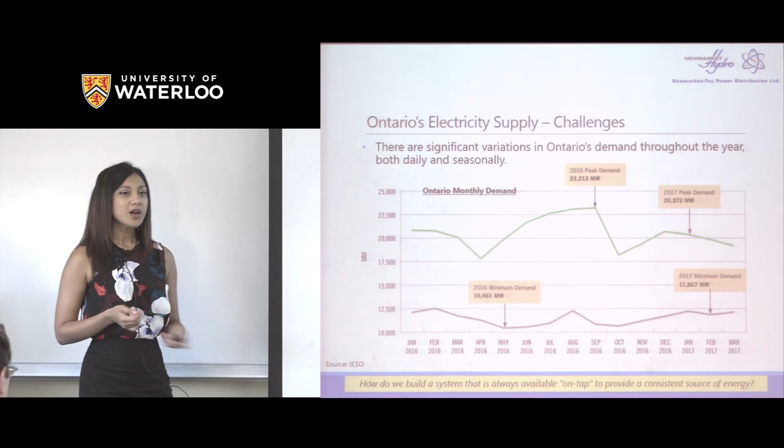So one of the challenges of Ontario is that we're unique in the sense that we have significant seasonal variations right down to a daily variation. This is just a snapshot I pulled off the IESO website. You'll see that we peak really high, but when we don't need energy or demand, we're quite low. So one of the challenges is how do you design an electricity system that's always there, where it can meet our peaks, but also you're not going to waste any extra energy you generate.

If we create a system that's always operating at this level, you're wasting a lot of that power that you're creating. Power is money to create that extra energy. Similarly, if we're always down here, your lights are going to go out as soon as we start peaking and getting extra demand. So one of the challenges the IESO has is how do we balance the different sources of energy to make sure electricity is always available? That's one of the things we have to consider when we're looking at the supply mix.

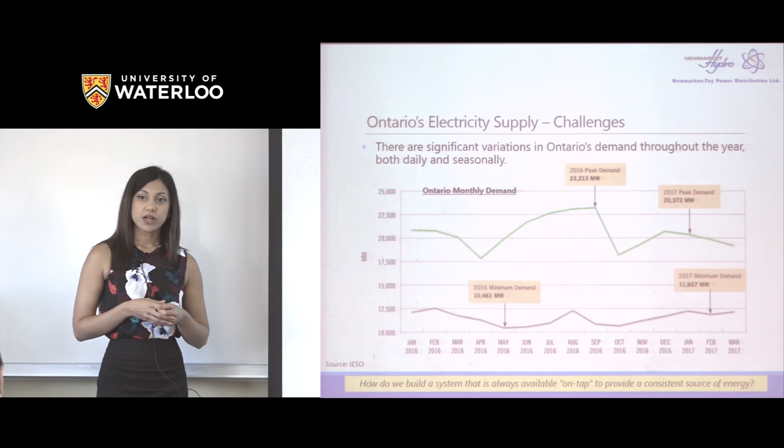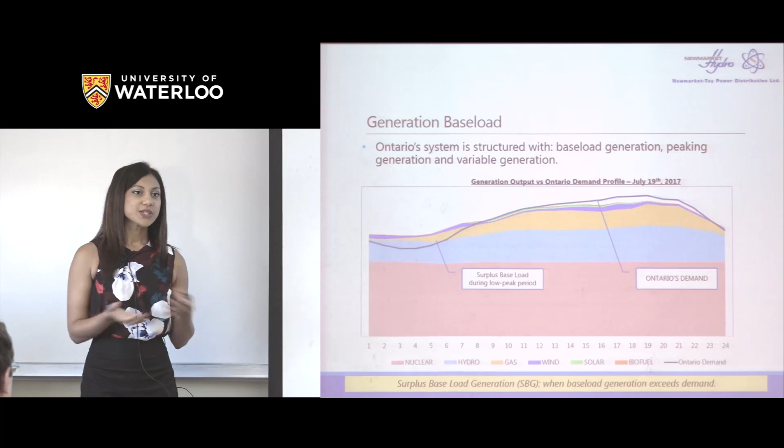So what is the IESO solution? What does Ontario do to take into account all these challenges that they see on a daily basis? This is actually one day. As I mentioned, in a day our demand fluctuates quite a bit. Here in the morning, everyone's asleep, so our demand's pretty low. During the daytime it starts peaking. But it's interesting that our peak is actually between 5 to 8 p.m. in the evening. Usually people go home from work, turn on their ovens, stoves, everything. All of a sudden, Ontario's peaking, right?

But the whole planning of Ontario's electricity system is such that we have what we call baseload generation. These are our nukes, our nuclear guys, as well as hydro. These are on 24/7, so your lights are always on. They're always providing energy to us regardless of what time of day it is. As you can see, they're fairly consistent throughout the day.

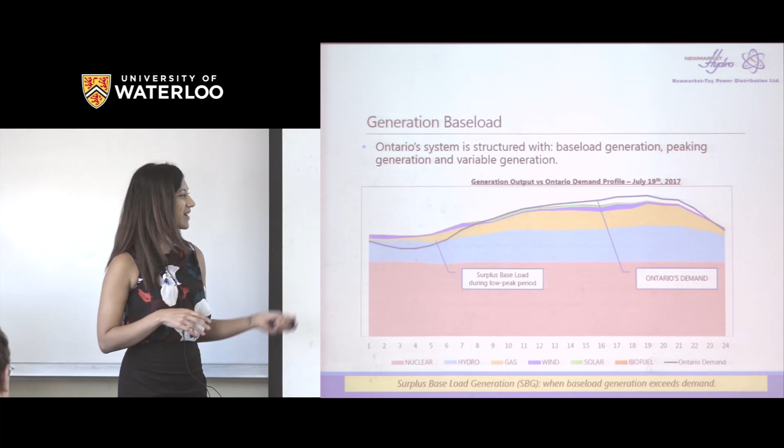And then as soon as we start peaking, we start tapping into natural gas, right? So natural gas is what we call peaker generation. So they're fairly good at ramping up and ramping down without any financial implications. A nuclear power plant, you shut it down, it's going to take a couple of days for it to ramp back up. So you might have some instances where you don't have any power. So we try to keep those guys on all the time, whereas our gas generators will kind of kick in.

And then solar and wind and the other renewables, they'll come in on their own, depending on when is the wind blowing, or when is the sun out. So that's what we call variable generation. So we can tap into them. If it's a sunny day, sure. If it's cloudy, solar is not going to do much for us, right? So it's really a game for the IESO. They're looking at their supply, they're looking at their demand, saying, what can I tap into today to make sure our lights stay on today, right?

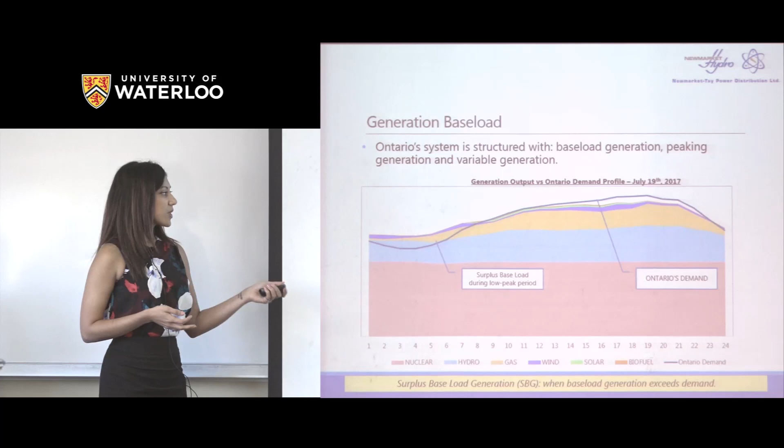So one of the things that I hope struck some of you when you're looking at this is if you have something that's on all the time, what if Ontario's demand is low, right? We don't need that extra energy. So if you look here, we generated all this stuff here, but we didn't need it, right? So that's money. It costs to generate energy. So what does Ontario do with that extra energy? Sometimes you have instances where we don't have enough energy. So where do you get that extra from, right? So this is what we call surplus baseload generation when this happens.

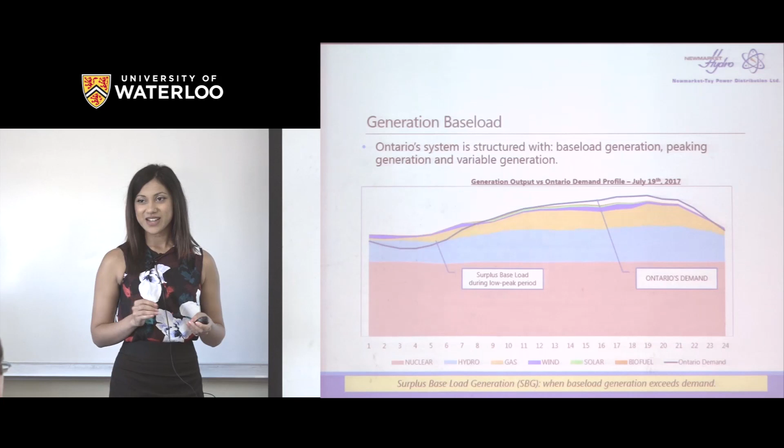As some of you may have heard, we have some contracts with our neighbors to sell them our energy. So when we have extra energy just kind of sitting there, we say, hey, Mr. Quebec or whatever, would you like to take some of our energy for this cost? The problem with that is it's really cheap, because if you're trying to get rid of something real bad, you're obviously going to put it at the lowest price possible. Sometimes these are at negative prices too. So that's one of the issues with surplus baseload generation, right? Because once electricity is generated, the instant it's generated, it disappears.

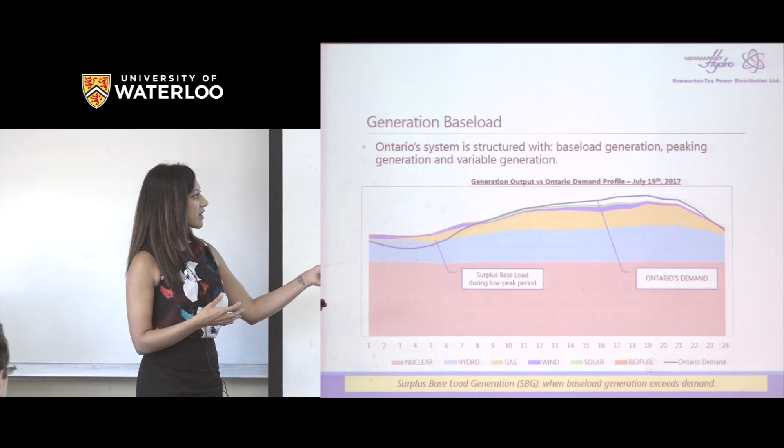This is kind of alluding to what I'm going to go into a little bit later, but can we find a way to keep that electricity here and maybe use it a little bit later, right? Because we're going to need it. This generation, if we kept it, we could have used it later in the day instead of selling it to somebody. Another challenge is with wind and solar. As I mentioned, wind and solar, they're on their own accord. I can't control when the wind is going to blow. I can't control when Mr. Sun is going to come out and generate energy.

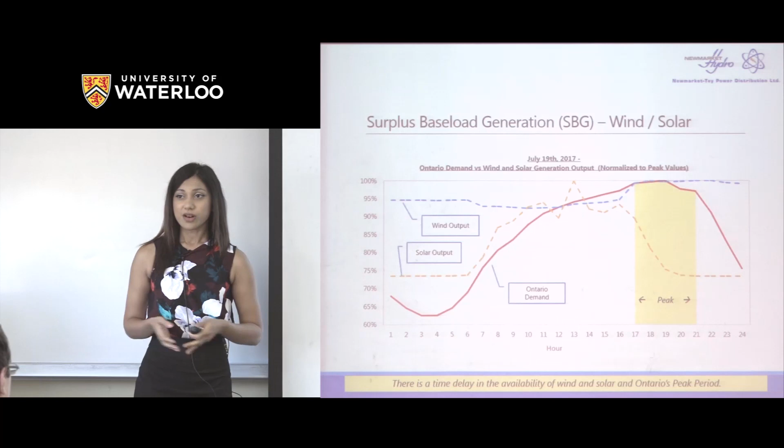So you'll see here the same day, we had our demand go like this, but wind was actually at 95%. It was generating all day long, but we didn't really need it. You see we were low demand here, but wind was pushing out a lot of energy. Same with solar. Solar is pretty useless during peak time here, but it was peaking in the middle of the day around noon, when we didn't really need it. So a lot of the time their capacity factor, meaning how much of their energy we're really using, is maybe like 30% or lower, because we're not using them to their full capacity.

So these are where our generators are. Again, I stole this from the IESO website. It's actually a dynamic website, so I do encourage you guys to go and have a look. You can click on these links and see, okay, what is this plant called? How much is the output? But you can see it's all across Ontario. Wind is kind of just congested over here, but hydro and everything is everywhere across Ontario.

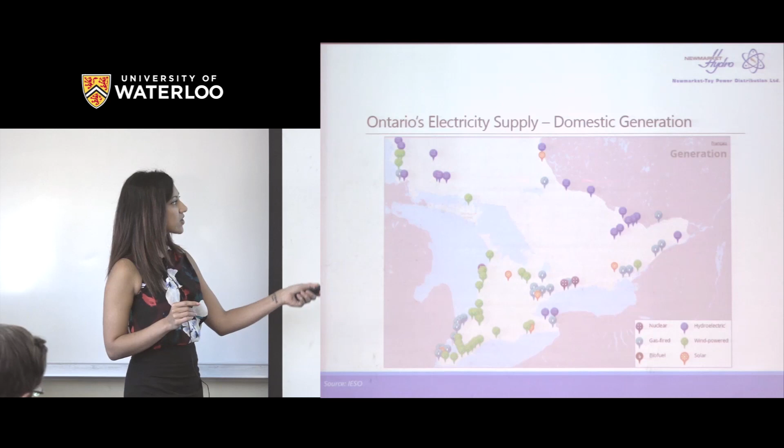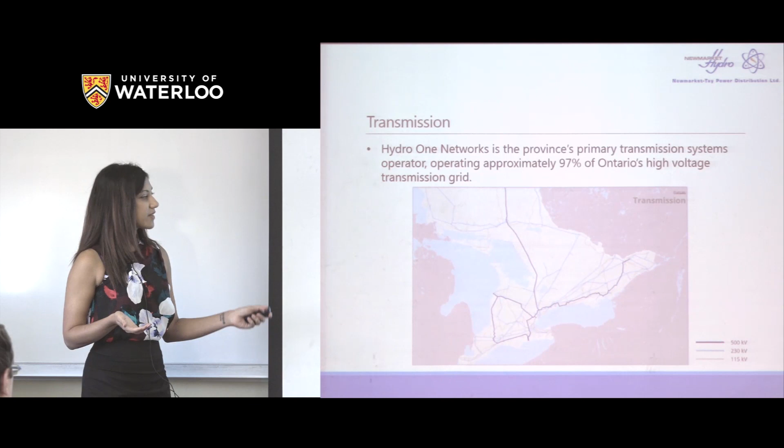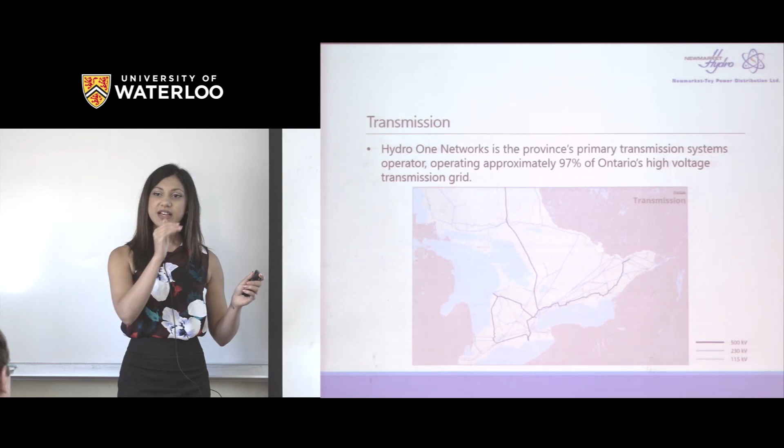Transmission, I'll keep this one quick. Hydro One Networks owns most of the transmission lines. And as in this chart here, the lines will just connect all these generating facilities to local distribution companies so that they can tap in and get that energy. These transmission lines run at various kilovolts, so they're really high voltage lines. When you look at them, the big ones that carry the wires, they're the high voltage lines, so don't touch them. They'll take you to your local distribution company, and there they get stepped down in voltage so that they can be delivered to you and I.

So distribution, sorry for all the text, but all it essentially says is local distribution companies own and operate the distribution network. Distribution, as the word implies, means we distribute energy to customers. Newmarket-Tay Power, we are a distribution company, and each distribution company has its own jurisdiction. They have a customer base, and they're responsible for making sure those customers get their electricity. When selling the electricity to our customers, if you recall, I mentioned the OEB, they're the ones who set the electricity rate. So we're responsible for making sure the same rate is applied to all of our customers.

The distribution rate, the rate that we charge our customers for getting the electricity to them, we put together, but we do have to get OEB's approval in order to do that. So I'll probably be paying the same rate for electricity as you are here in Waterloo, and I'm in Richmond Hill. However, the distribution rate may vary depending on whichever utility you're with, okay?

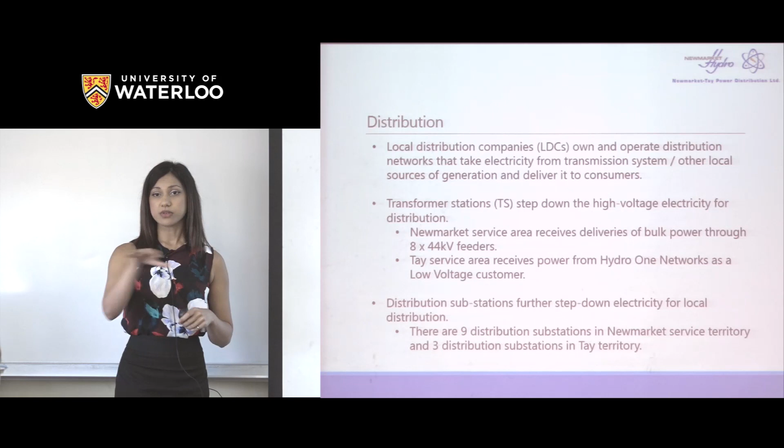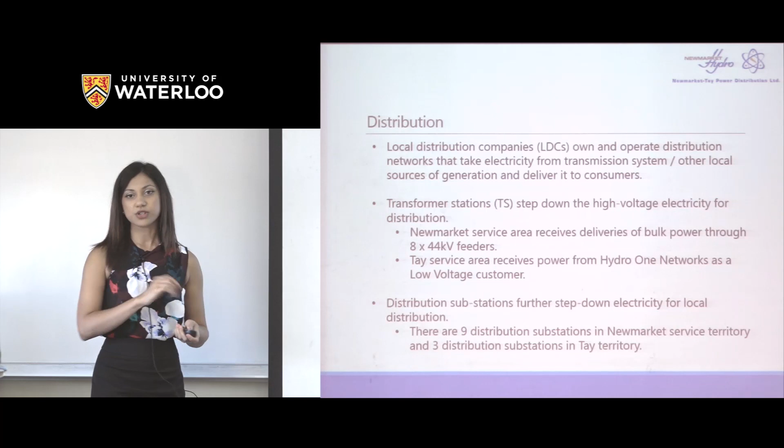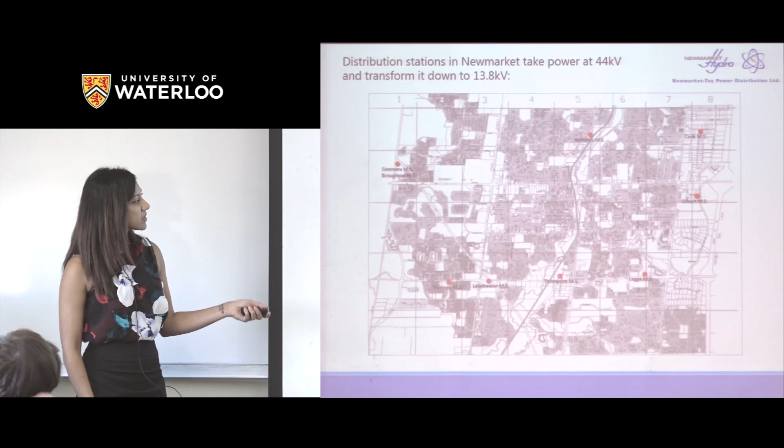So those big transmission lines will take it to a transformer station, and each utility will tap into the transformer station, step down the voltage and use distribution stations to distribute the electricity. In Newmarket, we have 9 of them. We tap into Hydro One's transformer stations, and then we'll distribute it to our customers. This is just a map of where in Newmarket we have our distribution stations, spread out so that we can reach all of our customers in the most economical way possible. Obviously, we don't want to be using this one to get someone down there. We would probably tap into this one for that person there, right?

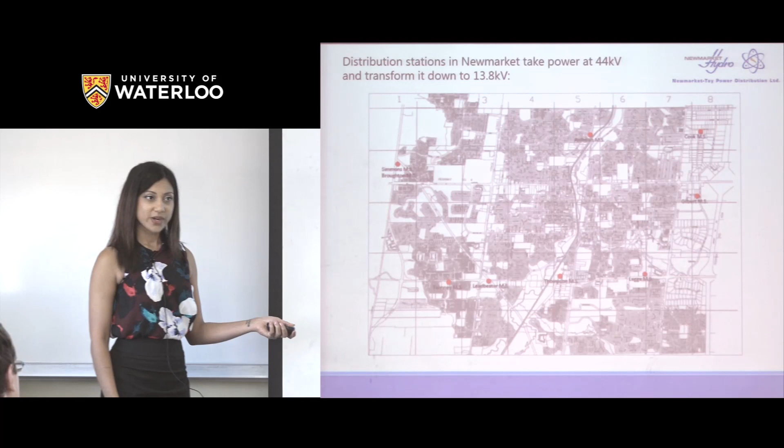You may have heard of a lot of utility mergers and acquisitions happening. That's their method of trying to deliver electricity in a more cost-effective way. If you team up, maybe you can bring down some rates, or maybe you can offer some better services to the customer base, right? So that's utilities.

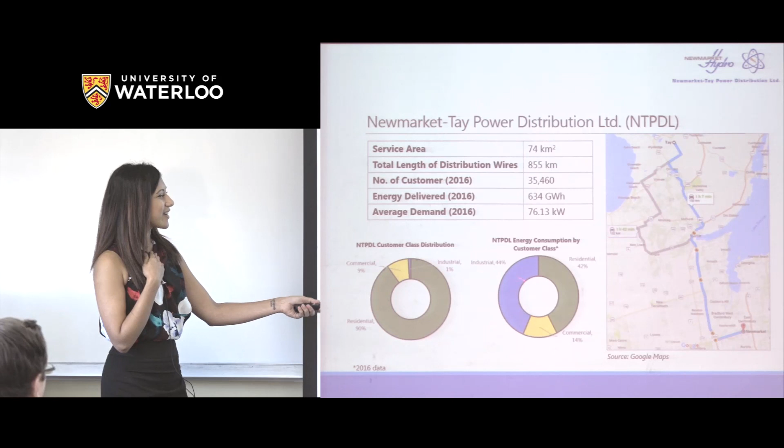Commercial, small, industrial, 1%. So we have a lot of auto manufacturing companies. By a lot, I mean like a handful, but in our world, it's a lot. However, if you notice their energy consumption, you'll note that our industrial guys really do take a lot of energy for their production. So when we're out there trying to reduce energy or save costs and things like that, sometimes I just talk to the industrial guys and say, we need to really look at your processes, right? Because what can you do to do it a little bit better so we can bring your consumption a little bit lower?

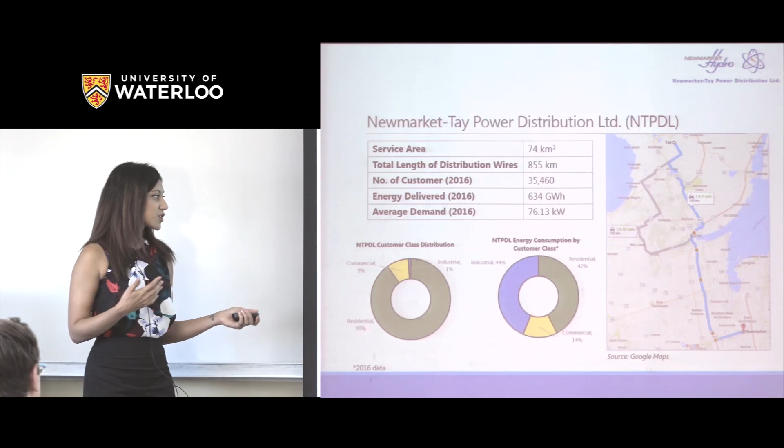Residential, this is probably a good indication of, we have a lot of people, so that's an expected outcome. Industrials, you can kind of play around, offer them energy management services to see, okay, to make that particular part, maybe we can look at it another way to do it, right?

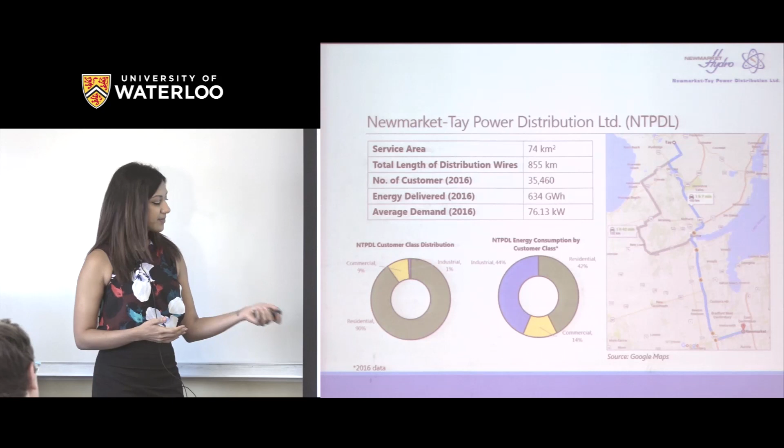So service area, that's us, we're a square. You can probably get across in about 15 minutes. This is Tay as well. So Tay, rather than being an urbanized kind of area, it's more of like a touristy thing. They have a lot of harbors, so you can sit there and have fish and chips and enjoy. So you don't really have a lot of industrial, actually I don't even think there's any industrial folks up there, okay?

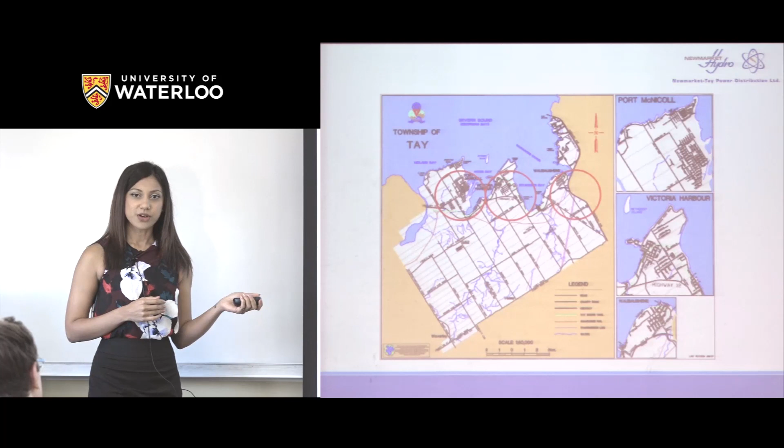So I'm just going to go over some of the stuff that we've done in the past and what we're actually doing currently as well, to really show you that, even though it's a small utility, we can really help in a big way. So as I mentioned, energy conservation, demand response. So demand response just meaning, instead of using your electricity when it's peak time, can you maybe shift it to when it's off peak, right? Can you help us out a little?

And then we also have a couple of small scale pilots on the go, which Ted will also speak about one of them. He's the project lead for that. So hopefully that'll give you an idea of what we do have in the pipeline to hopefully advise the bigger implementation across Ontario.

Energy conservation. So as I mentioned, this comes just from the Ministry of Energy. It's been mandated that we have to save, I think it was 7 terawatt hours by 2020 and 30 terawatt hours by 2032. So this is just a mandate all across Ontario. All utilities have their targets. So what we did was all of us got together, because you can't just say save 7 terawatt hours to all of Ontario. This target was broken down into different utilities, and each utility has their own target that'll roll up into the full 30, hopefully by 2032.

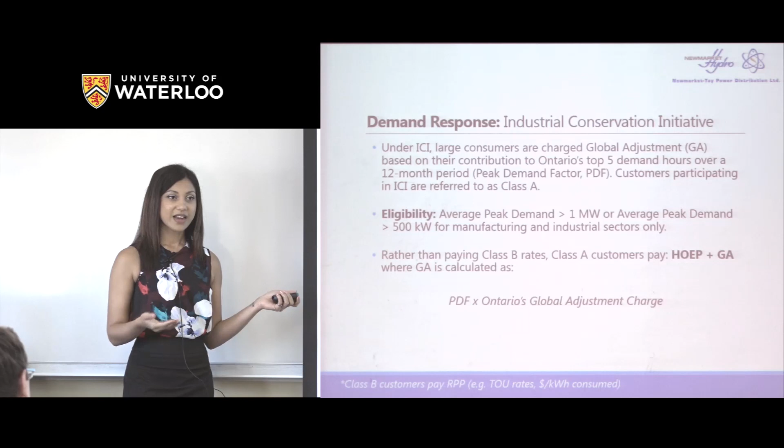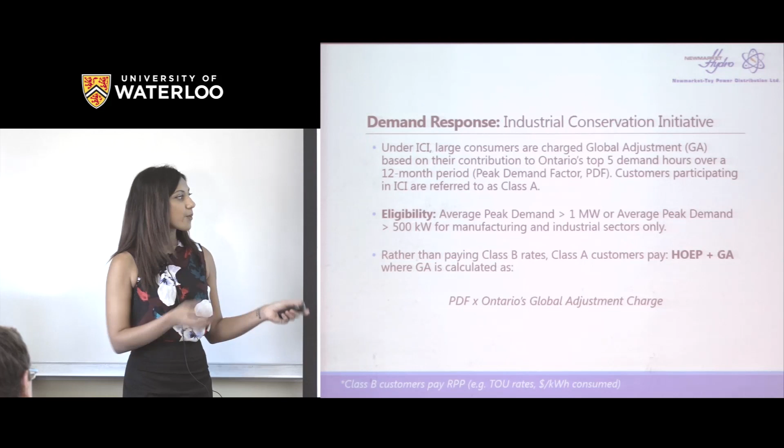So if everyone's paying such a low price, who's going to pay the global adjustment? That's why it's distributed amongst everybody. For you and me, it's all mixed into our rate, so we don't see it. As you become a larger consumer, you see it as a line item. So to motivate them to stop using so much electricity at peak time, they'll say, okay, fine, we'll give you a break on your global adjustment. Just use less energy during the Ontario peaks.

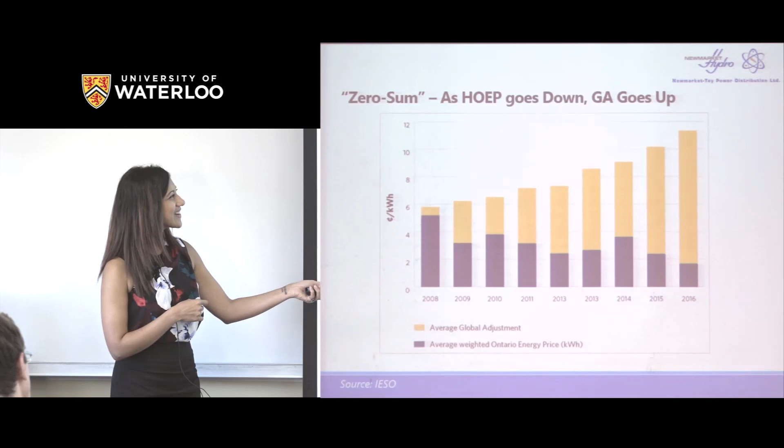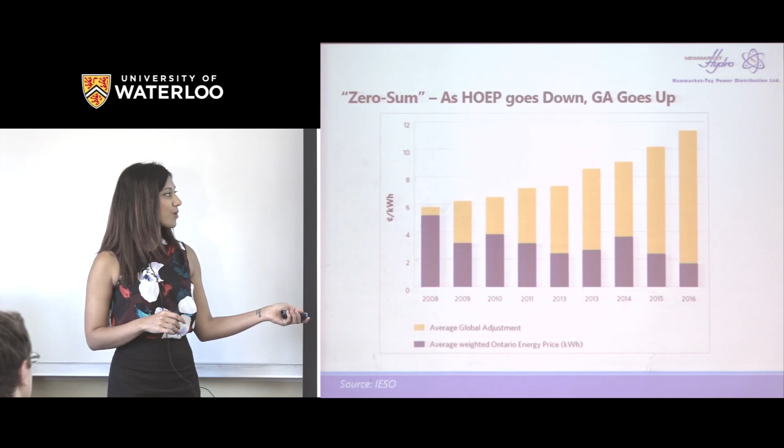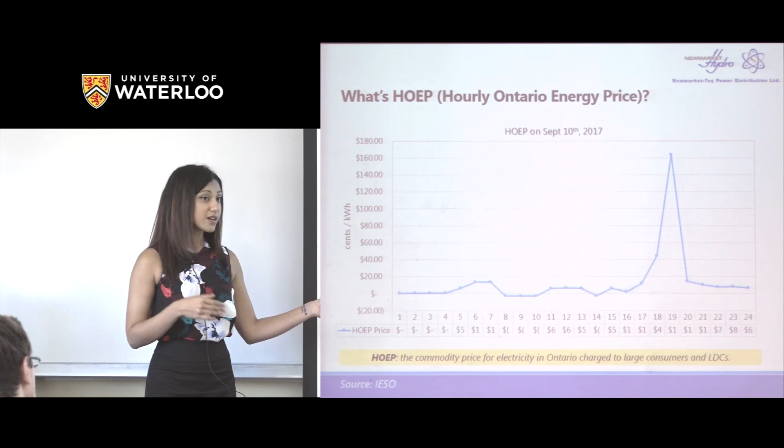So how does this all connect to Newmarket? We didn't have any, they're called Class A customers when they enroll for this particular benefit. We didn't have anybody for a long time, and the government of Ontario was really nice, and they reduced the eligibility requirements, and last year we signed on 10 of them.

So they're all like gung-ho about saving electricity now, and they're always monitoring the Ontario peaks to make sure that maybe during that time I'll turn off all my lights, and these are big plants, so that makes a difference. Or they'll say I'll shut off a couple of my lines because I'll do this maybe tonight instead of right now, right? Because it's really hot outside. It's probably going to be a peak. So in that way, we've really helped.

So I'm actually interested to see what it'll look like next year, to see if these guys actually made an impact, right? So I know the impact on all of Ontario has been huge. Like, we've avoided a lot of generation facility installations or things like that, because we were able to shift that peak, right? So it's all about how can you tactfully use energy with what we have without having to build new plants, things like that.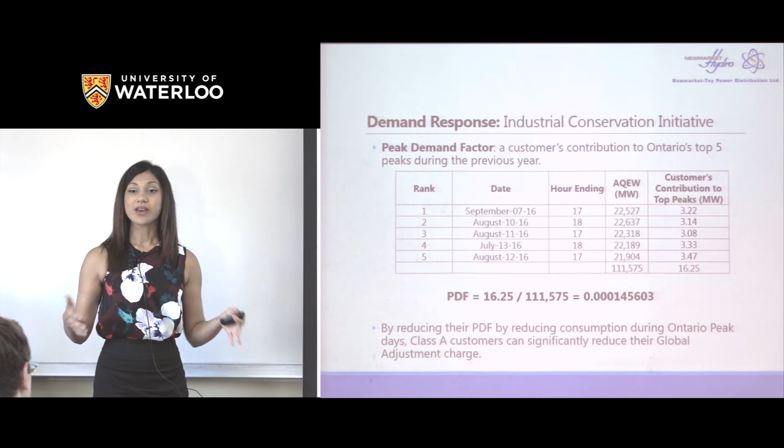So similar to that, here's a fun fact. Newmarket-Tay Power was actually one of the first, if not the first, to deploy TOU, time of use rates. So the rates you guys see with on peak, off peak, all that. We actually ran a pilot way back in the day when it was about to be introduced to see how successful it is, right? And even though we were small, it was only for about 250 residential customers.

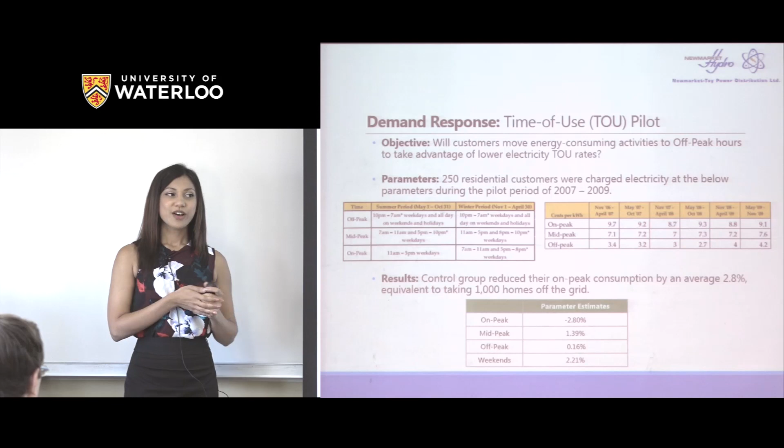We ran it and we saw, hey, look, we actually moved about 3% off peak, right? People were motivated by, instead of paying 9.7 cents for my energy, I can actually do 3.4 cents. That's like a third less, right? So we found that it was actually quite successful in installing smart meters. So we used a mascot called Smarty.

Installing smart meters, we were really at the forefront with the Ontario Smart Metering Initiative to get these smart meters out. And then finally, the entire province ended up rolling it out. And essentially, this is a form of demand response, right? It's really moving the peak times, encouraging people to operate off-peak. So a lot of customers, even I myself, I know I don't want to turn anything on until 7 p.m. because that's when I know it's going to be cheap, right?

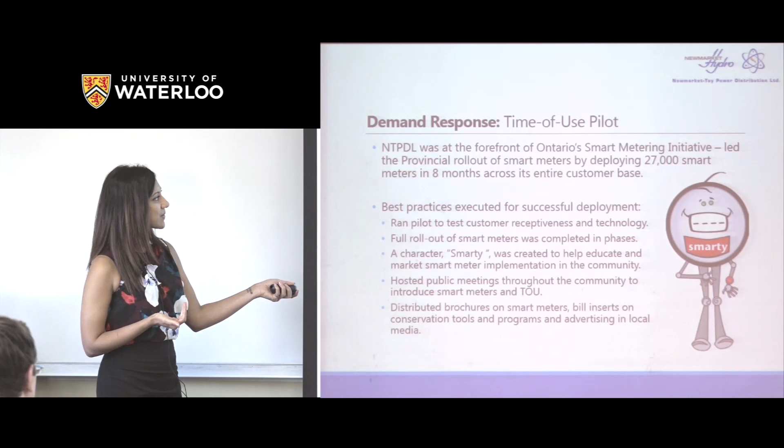So that was that. And this is actually an interesting one that we actually have on the go right now. So just to give you a little bit of background, the long-term energy plan is directly from the Minister of Energy, and it's been put together to see how we can set goals for Ontario for energy, energy conservation and getting renewables into the grid, things like that. So one of their mandates was, as a province, we have to procure 50 megawatts of energy storage, right? So energy storage is new. There's a lot of great stuff out there, but here it's pretty new.

And we don't know if our system can really take that. As I mentioned earlier, we're a one-way flow system. So we're used to giving energy, but we're not used to getting it back, right? So what would be required to make sure that we can get back energy from, for example, an energy storage device that's maybe been charging overnight and wants to feed back? We don't know if our grid can take that. So really, what can you do? You just deploy pilots, right?

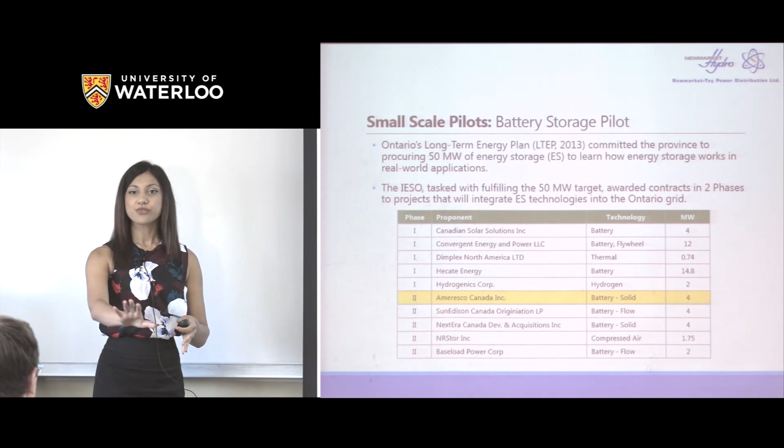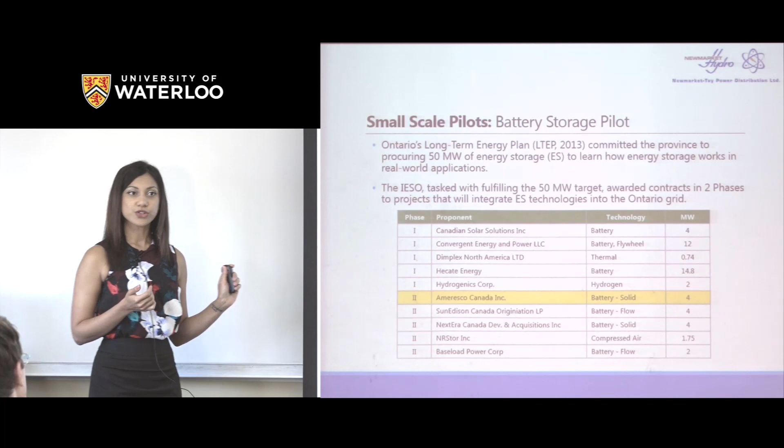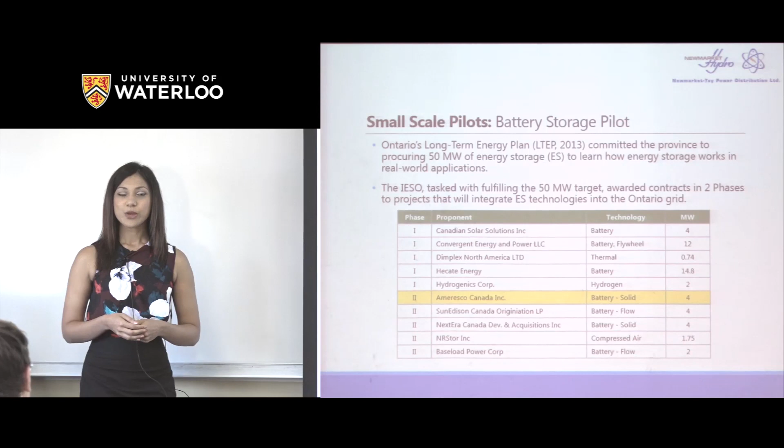So this responsibility was given to the IESO: okay, here, you figure this out. So what they did, they awarded a couple of contracts to energy storage companies or affiliates, and they were asked to reach that 50 megawatts of installations of energy storage units. These are the winners of the energy storage procurement. Now, I've highlighted this here because Ameresco, where it's going to be installed is none other than in Newmarket, right? So we're going to have a battery storage facility located in Newmarket territory, and we're helping with the hookup and everything like that.

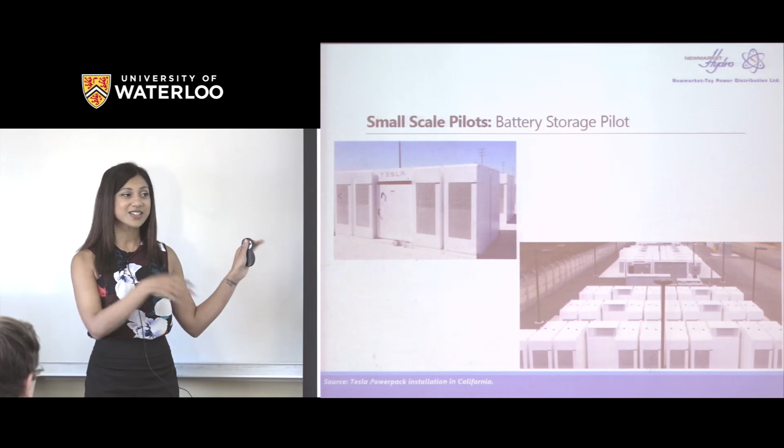So what are they installing? They're actually installing Tesla power packs. These power packs look like little refrigerators. I'll show you in a second. They look like this. This is not ours. This is actually an install that you can Google; it happened in California. A lot of utilities are jumping on board, and we're going to be one of the first in Newmarket. Essentially, they look like refrigerators, and they have, believe it or not, the same batteries you see in the Tesla cars, stacked in there.

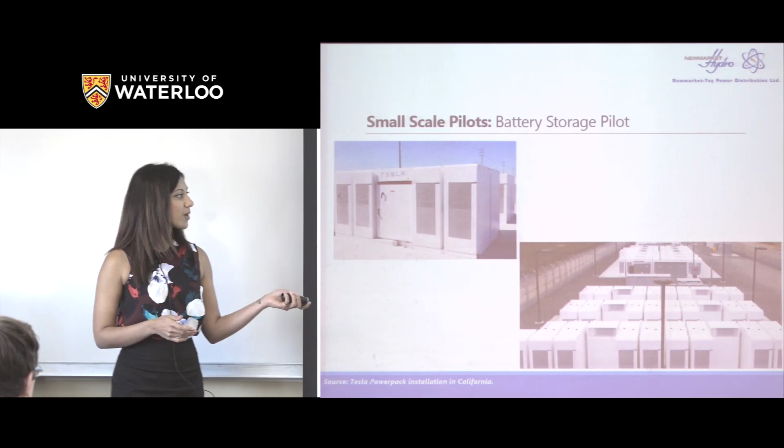And how we want to be using these once they're installed is peak shaving, the thing I've been talking about this whole time: store energy when it's really, really cheap. Remember, it was cheap in the morning or overnight. So run those batteries during the nighttime, store the energy. And then when we start peaking, turn on the battery instead of tapping into a nuclear power plant or something like that. Doing that, we'll be able to really levelize Ontario's demand, so it's not always sporadic like that.

So ours are actually going to be two 2-megawatt batteries, Tesla power packs. Nothing's been installed yet. We're hoping for mid-May next year, 2018. So you're always welcome to Newmarket to have a look. And they do have a contract term of 10 years to really assess whether our grid is able to take this. And if it's successful, we think this will help drive towards a distributed energy system where, rather than transporting energy from a central location to all the different customers, we have batteries or local distribution areas where you can generate your energy and just use it on site.

Another cool thing about battery storage, you can add them to solar panels, right? So those are things being explored right now. Maybe we're a little behind the game, but we really want to test the water first before having like 1 million Tesla batteries installed. So we're hopeful that this will really guide us in that effort.

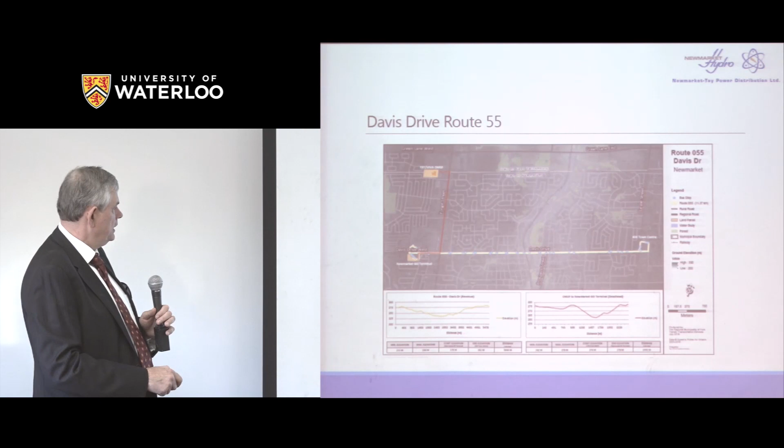This is an example of one route. This is the Davis Drive route in the town of Newmarket. Not sure everyone's familiar with Newmarket, it's the north end of Toronto. But basically you've got Yonge Street here, Davis Drive here. The bus will run from the Newmarket bus terminal to the west of Yonge Street, all the way across Davis Drive to the 404. There's a parking area there. And it just goes back and forth. The total length of the route is about 11.3 odd kilometers. The charger will be located right here at this bus terminal, so when they arrive here, they'd come in and get a boost from the charger on the battery pack.

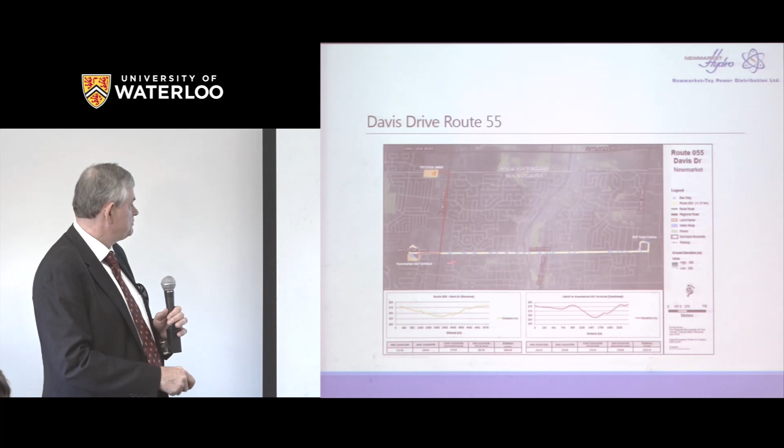Some of the things here are showing you some of the route profiles in terms of distance, showing elevation issues. So when buses have to climb grades and everything else, that has different demands on batteries. The frequency of stopping and starting buses will also have a demand on the battery that is different. For example, if you're running flat out, you're going to use less battery capacity than if you're stopping and starting all the time.

This is just another example of the route here, showing the specific route it covers. And this is going right through the main area of Newmarket, and in fact through the major Southlake Hospital area here. So there's a major medical health center in this whole area. And this whole area is going to be considered a transit hub in terms of growth as well.

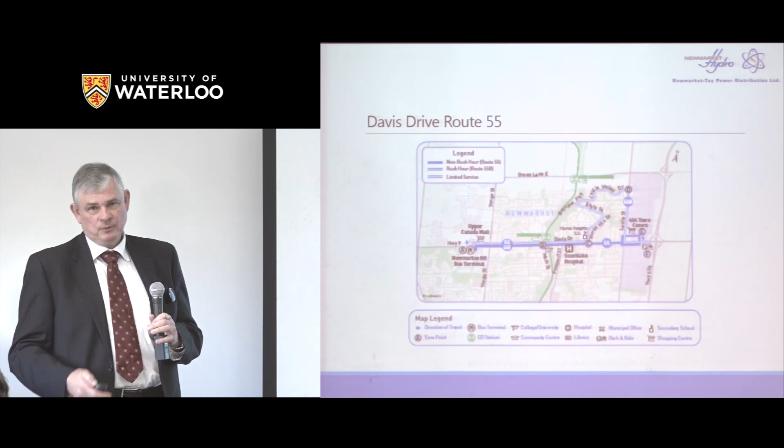This is a second route, sorry, if I can go back here. The buses that will be deployed on this route will be the New Flyer buses with a 200 kilowatt-hour battery pack. Being 11.4 kilometers, it's considered a bit of a longer route. And York Region Transit, which are the bus operators, their main concern is service availability, 90% plus on-time statistics, so they can't afford to have problems with buses that have charge issues or capacity issues, etc.

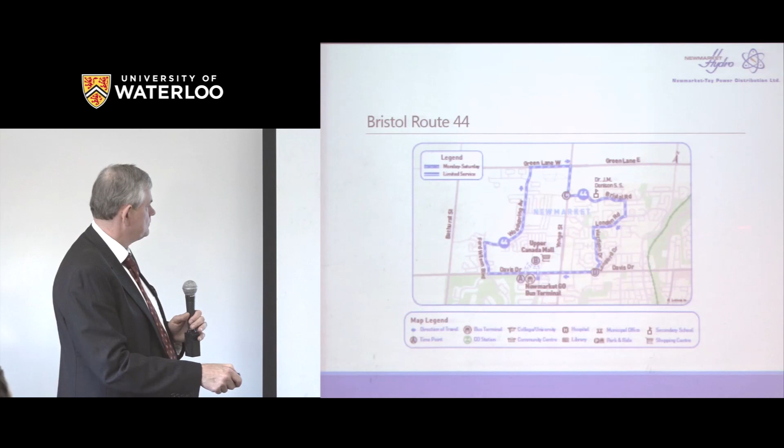The Bristol route is another route that's again starting out of the Newmarket bus terminal here where the charging station is located, but it'll follow a more northerly route through neighborhoods. And it's going to be run by 2 Nova buses with the 76 kilowatt-hour battery pack, so essentially a shorter route. And it's about 8 kilometers in total route length.

Now for the technical part, these are the overhead charger specifications. So the input voltage is 600/347, so they're going to get supplied from Newmarket-Tay Power.

We will provide a 3-phase pad mount transformer, taking power from the 13,800 volt grid, transforming it down to 600/347, and then that will feed into the charging substation. The output voltage of the substation will be in the 450 to 750 volt DC range. So it's a DC voltage coming out of the substation to power up the battery packs.

And the power rating is going to be about 450 kilowatt maximum output power, to be able to put in as much energy as we can in a limited amount of time. Some of the other specs we have: limit on total harmonic distortion not to exceed 5%. This is an overhead inverted pantograph.

So basically the charging station has a mast, and you'll see that shortly, where a pantograph comes down and attaches to bus rails on the top of the bus and then starts the charging process. In other cases, the pantograph is actually on the bus, and you'll see this in Europe, where the pantograph goes up and plugs into rails that are on the charging mast.

Coming down is considered to be a bit more efficient, and this pilot aims to prove the efficiency and the application of the overhead inverted pantograph method. The charging process is going to be based on an OppCharge automatic conductive charging interface. This is a charging interface that was developed by Volvo, ABB, Siemens and a number of other key players over in Europe.

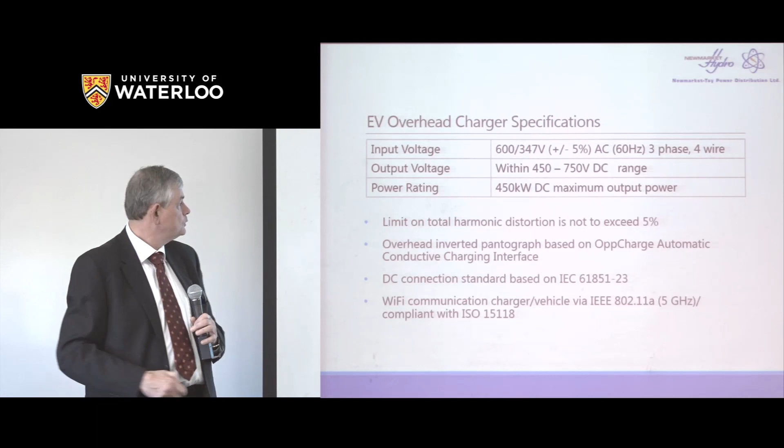When the bus comes under here, there's communication between the bus and the pantograph through Wi-Fi. And when it senses that the bus is in the correct position, the pantograph comes down, touches the rail, and begins the charging process.

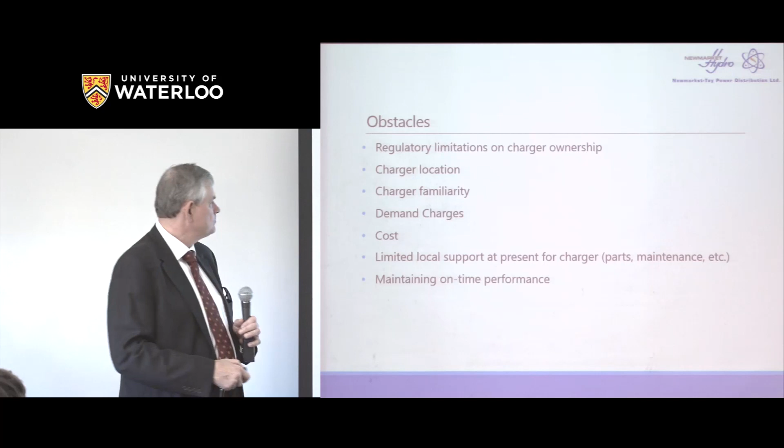Cost. These are expensive units. You're talking about a bus is about a $1 million bus. That charger is about a $1 million charger, roughly. Limited local support for the charger, parts maintenance. Right now, the chargers are made in Europe, so they'll be shipped over here. So we have to have agreements with the OEMs to have the associated parts and personnel available within a specified time period to make sure these things are running.

Again, we are essentially going to be the fuel supplier to York Region Transit. They have a service uptime requirement.

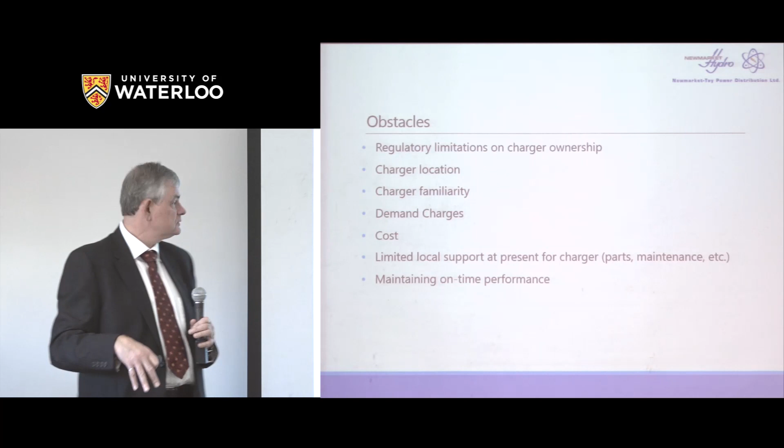They need to be there on time, so we have to make sure that from our end, not just the bus is working properly, but also that charger is working properly at all times as well. And that was maintaining on-time performance.

Okay, long-term, some of the risks, this is new to us, so some of the risks we're taking on with this pilot is we don't know the long-term reliability of the station infrastructure. It's new equipment for us. We're quite familiar with things we work with every day. This is somewhat new, so there's a little bit of a risk there, although we rely on the OEMs that have built these chargers, and generally there are two OEMs that built these chargers that we'll be using in these pilots in Ontario. One is ABB and the other is Siemens.

Post-trial cost of ongoing maintenance and support, how much is that going to cost us? So if those costs tend to rise, then that has an implication on the cost of ownership as well. Changes in the route. Again, we're the fuel supplier to the transit. If they change the route, then that charger there is a stranded asset. So we have to work closely with where these things are going to be. They have to be in key locations where you're not likely to change the transit routes.

And commitment of the local agency to continue the utilization once the trial is completed. So once the trial is completed, we're looking at them to say, okay, you guys should continue to be using these buses.

Existing station compatibility with finalized plug-and-play charging systems and future buses. So this, again, comes down to the standards that are being developed right now. So again, part of this pilot is to develop a coherent set of standards and to basically have all the OEMs of the buses and the overhead chargers saying, yes, we're all going to use these same standards so that we're all compatible. In other words, I can use an ABB overhead charger with a Nova bus or a New Flyer bus, and the same thing with a Siemens overhead charger. I will be able to use that with a Nova bus or a New Flyer bus, and there should be no issues of compatibility.

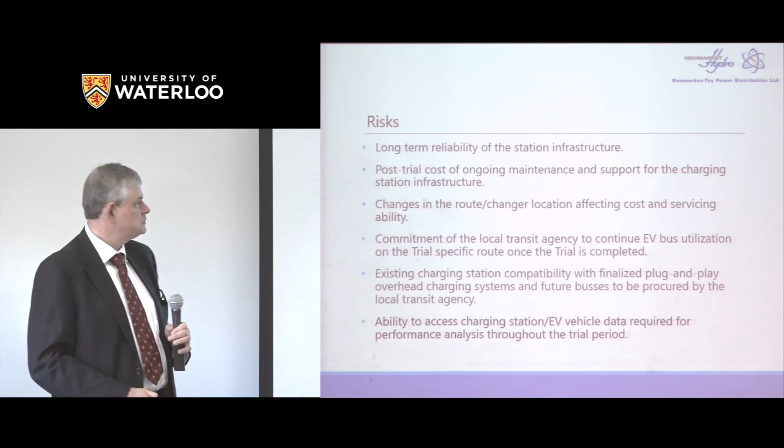Some of the other issues will be alleviated through discussion and standards, and that is the ability of the charging station and utility to communicate with one another seamlessly to support demand management mechanisms or load shifting. In other words, our ability to control that charger as required, perhaps ramp down the power at a certain time that it can provide to the bus. And we have to basically get the charging station providers to demonstrate that their communication tools have been optimized for our environment.

Current and future regulatory decisions affecting ownership really have a huge impact on us. If the regulator tomorrow comes out and says you guys aren't allowed to own it, then that's a problem for us. Because generally what we're assuming is we're basically going to own and operate this charger, and the cost of that unit will be embedded in our electricity rates, and we have to make a rate of return on that.

And an example of where you can see the future is going on this is California, where the utility regulator, through state legislation, has changed their description of what's in the interest of the consumer. As a regulated utility, you can make expenditures as long as they're in the interest of the consumer. And some of the new requirements, I shouldn't say requirements, but what is considered to be interests of the consumer, are things such as greenhouse gas reduction. If you can demonstrate your expenditures are reducing greenhouse gas, that's in the interest of the consumer. That's new, and that's California. They tend to lead the way in that regard.

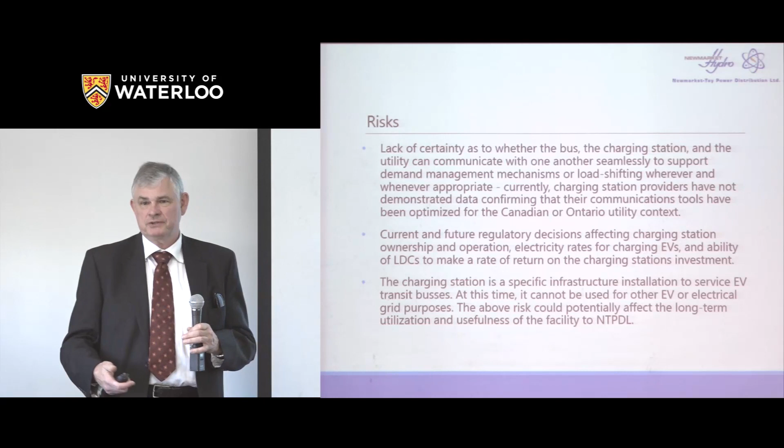And this is, again, a specific infrastructure installation to service transit buses. At this time, we can't use it for other EV or electrical grid purposes, so this is another risk that's part of the pilot. So these are all risks that we considered when we got into the pilot, and this is why we work closely with our partners at York Region Transit and CUTRIC. And that's the end of my part of the presentation.

So any questions for myself or Nirupa? So, questions?

So, are you socializing the cost of that charging station with the entire rate base? That's the intent. That's the only way it's going to work at the moment, unless the other option is the transit agency could own theoretically all the infrastructure, in which case it would be funded through the transit rates. So this is again something that, from the regulatory point of view, is a bit of a gray area right now. It provides, as you said, a reduction of greenhouse gas emissions, and with the Town of Newmarket and the Newmarket Community Energy Plan, this is considered to be in the public interest.

And so did York Region Transit not want to own the charging station? No, they actually preferred Newmarket-Tay Power to own the charging station and wanted to work with us. It's something new to them. They're basically saying, look, our expertise is in buses, not with the electrical side of the grid. They weren't just trying to offload the cost on the rate base? No, cost is a function. That's their position. Another utility, Brampton Transit, they're actually owning the buses and the charging station as well.